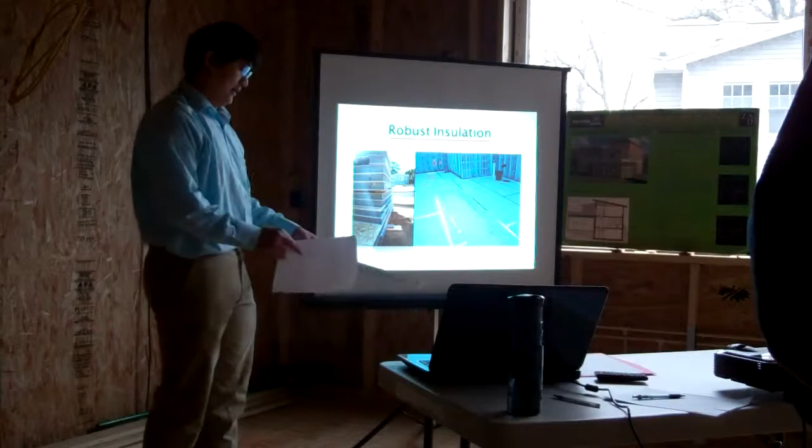So how do you actually build a passive house? There are a few important things. First, you need to have robust insulation. This entire home is built with SIP panels, well, except the foundation walls, but the above grade is all SIP panels. That is a sample right there.

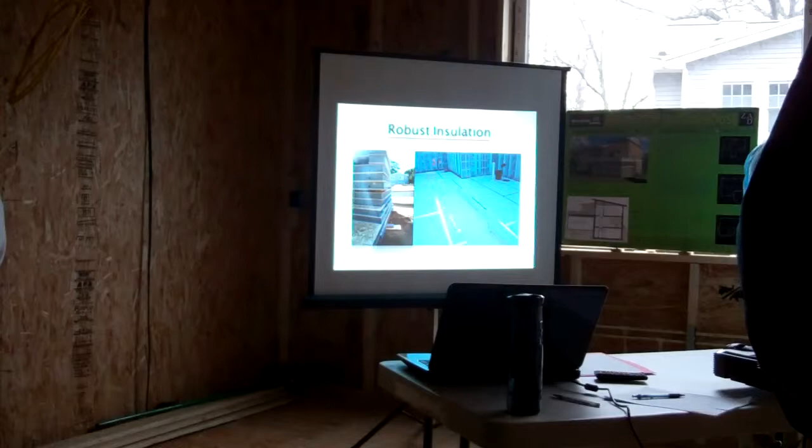Basically, I don't know if you guys are familiar with it, but in the middle, this is Neopor foam, EPS foam, which has an R value of about 4.69 per inch. And then you have it sandwiched between 2 OSBs, and you build with this.

Our walls have an R value of close to 40 because we also added 2 inches of EPS on the outside, because part of it is to break the thermal bridge. In between each panel you have lumber, and that causes the thermal bridge, so to negate that, we added foam on the outside. And they make other panels that don't have the lumber for the connection pieces. It just depends on which ones you go for.

Right. Yeah. And also, you see this channel here? This is for electrical. You can get ones that don't have these channels. Well, for the walls, we got ones with these channels because sometimes it's more convenient. But whatever holes we don't use, we're going to fill them up with foam.

So what happened here? I was curious why you were doing an additional frame wall for your plumbing. Right, because we didn't want to cut into the SIPs. And also, this allows us to insulate it even more. So this wall will be even better than this regular one. So you're still going to insulate it? That's exactly right. There's a hole, might as well. There's a cavity, you know.

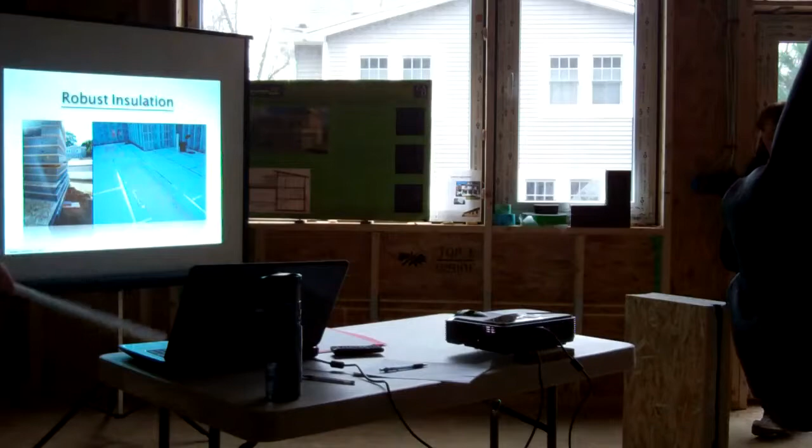We have R40 on the walls, and we will have R60 on the roof because it's a 12-inch panel. Really big SIP panel. Right. And then another important aspect of passive house is to have continuous insulation, and part of that is to have insulation under the slab. As I'll show you later, you can't see it now, but there's concrete. Underneath the concrete, there are 6 inches of foam.

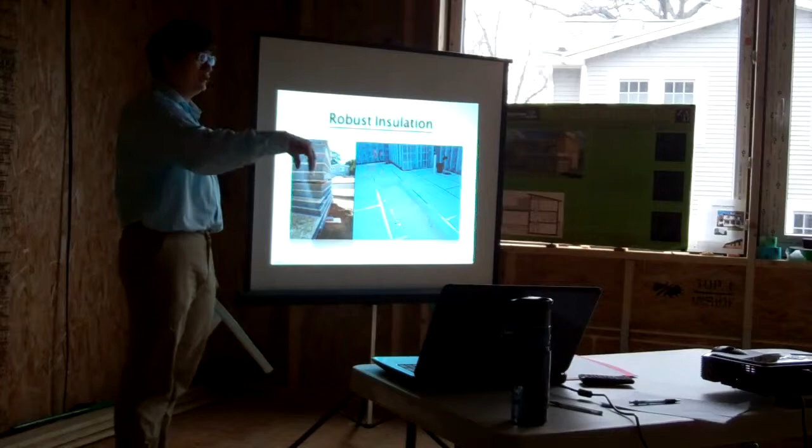We've covered it up and built it all together. It's kind of like a ship almost. And we have to have a sump pump and sewer ejection pump. We don't want that area to be a weak point, so we actually built a box, 6 inches all around with foam, and then set those things in. That way it's completely continuous. So.

Next is airtight construction. This is another aspect of how you make your thermal envelope strong. All the penetrations, you have to seal them properly. What we did was we used, these are all German materials. I don't know why, German engineering, you know, they just know how to do these things. But we use a big gasket, and then we have this, it's called Tescon number 1.

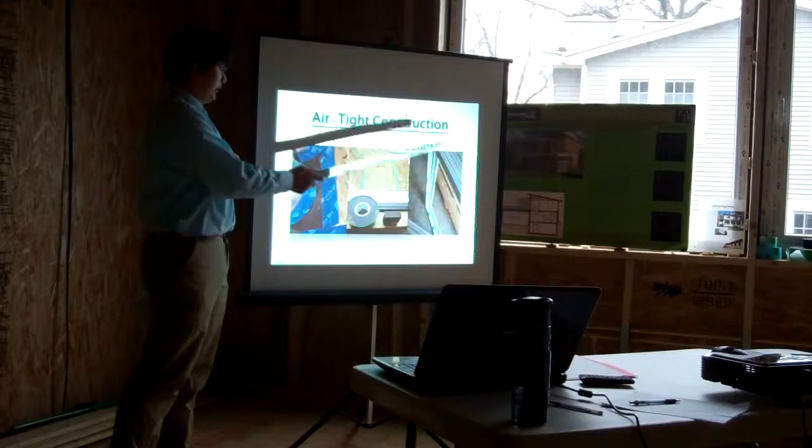It's a tape that you use to seal things like this. We have SIP tapes. It's over there, I'll show you in a little bit. It's a vapor open tape that we are taping all the joints in the SIPs. Some of them have already been taped, but not everything has been done yet.

Mind if I pass them around? Sure, go ahead and pass them around.

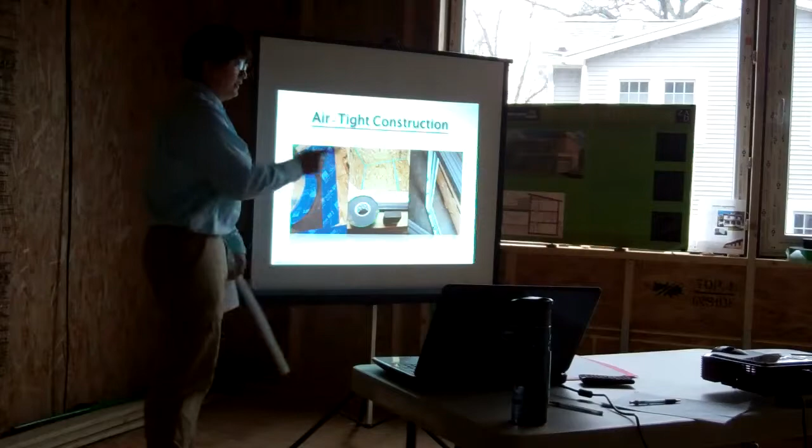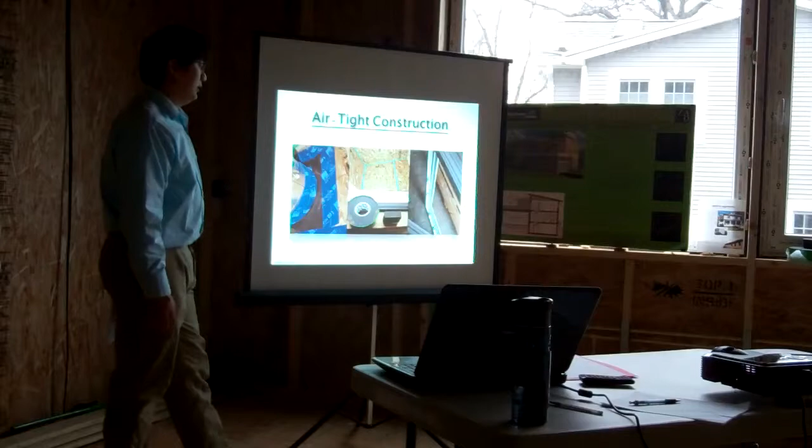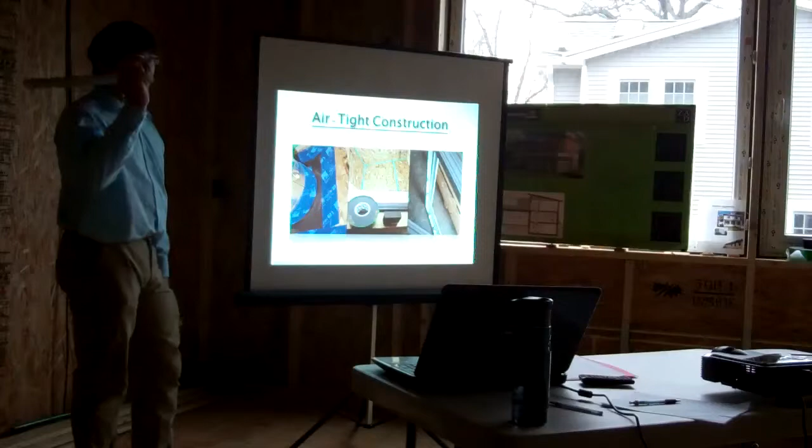Is this the blue one? That's the one, well, you can use that for that too. Those two are essentially the same, except one has a backer paper, but the other one doesn't. They're about 20 cents a linear foot. But it really does a great job. The adhesion is amazing. And also it's vapor open. So in case you get any vapor trapped in between the panels, there's a place to get out.

So, now we have windows. These are also from Germany. If you look at that over there, it's triple pane windows, and they were manufactured actually in an argon chamber. So they actually didn't inject them. They were manufactured inside a chamber filled with argon, so there's no possibility of leakage through those fill holes.

And also there's three different seals here. Let me just operate this one so you can see. Open it, you can see there's one layer of seal here, and here's another one, and a third one. And then also it has, on this window, 1, 2, 3, 4, 5, 6, 7 places that lock it. So that means you have an extremely airtight window when you close it.

You can see here, you see these little rubber pieces? These are the breaks so that the plastic does not carry all the way through, which stops the conduction. Exactly. So it's a little thermal break all the way through in addition to the airtight. Right. And also they use Swisspacers. They're warm edge spacers so there's no thermal bridging or anything like that. And another cool feature of these windows is this. If you don't want to open it all the way, just go like that for ventilation.

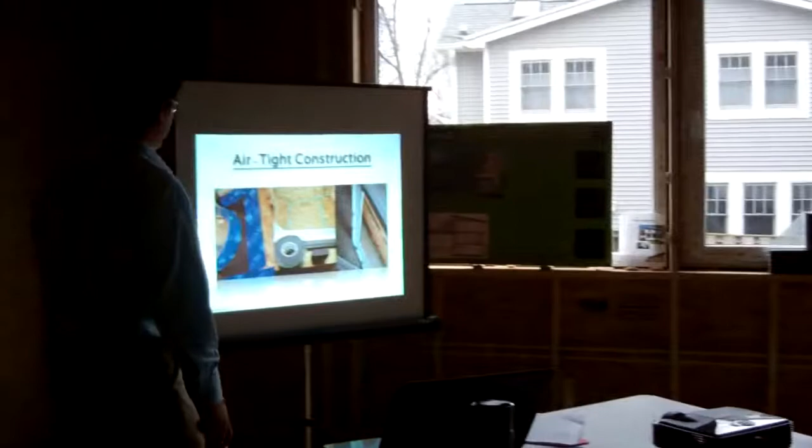To install these windows, we use this tape, which I have a roll here. This is made by a company called Tremco. It's owned by Americans now, I think. But it's an expansion tape. So what you do is you put it around the window. Within 15 minutes, it expands to this. And it basically covers up all the holes along the window. So you don't have to send a guy here with your foam and miss some holes. So you wrap the window itself.

Yes. In a way, it's for us to make sure there are no human errors. I don't think it's completely foolproof. You need to train guys to do it. And with that 15-minute time limit, you have to train them to do it really good and really fast. So what that means is you have quality of work and you have efficiency as well. So I think it's worth it.

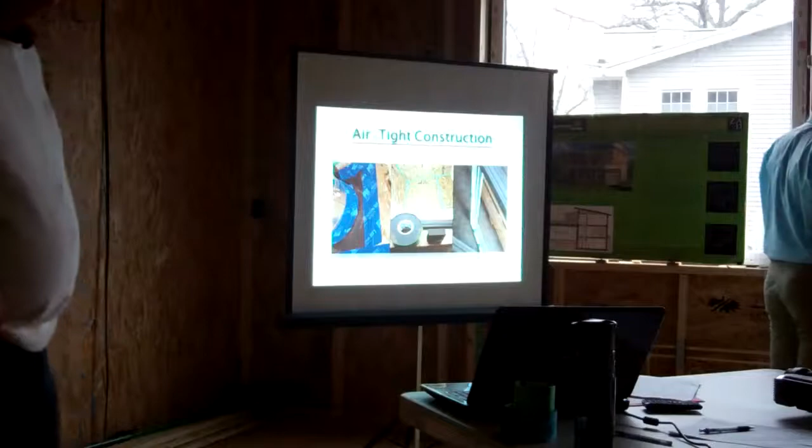Does it help with moisture management too? It does. It deals with 3 issues. Water. I think it is actually vapor open. Bulk moisture, exactly, bulk moisture. It's also insulation at the same time.